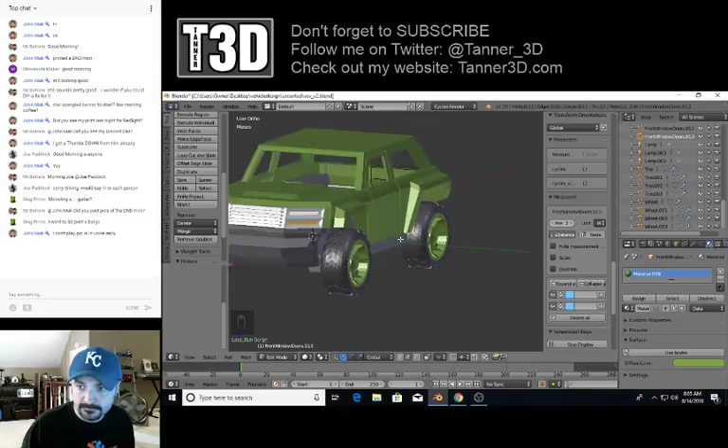Get this positioned. We'll go to the screen share. All right. This has been the latest thing I've been working on. And it's got a... hide that one. Nope. Is that what I wanted to do? Oh, it's because I was in edit mode. Hide that one, and hide that one. And hide that one. There we go.

So there's also a roll bar version of the new Jeep I'm working on. I've taken some of the things that I've learned in the process of modeling and building this stuff and decided to just start over on my Jeep. And so that's where I'm at right now, redoing it from scratch. It'll be fewer pieces, easier to print, easier to assemble.

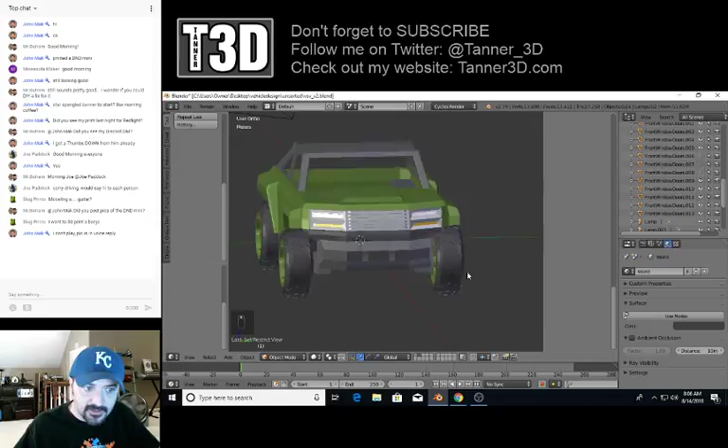So yeah, you see down here now, you can see it highlights, like right now I'm clicking down the middle mouse button, you can see it lit up. So we're screencasting the stuff that we're doing now, so that when I hit H to hide that, you'll see that I hit H, and H hides.

So you'll be able to follow along a little easier now with the stuff that I do, because any keys that I press or mouse clicks that I make will be highlighted in the lower left hand side of the Blender screen. Hopefully that'll make things easier for people that are following along and trying to learn how to do this stuff. Because that is the goal.

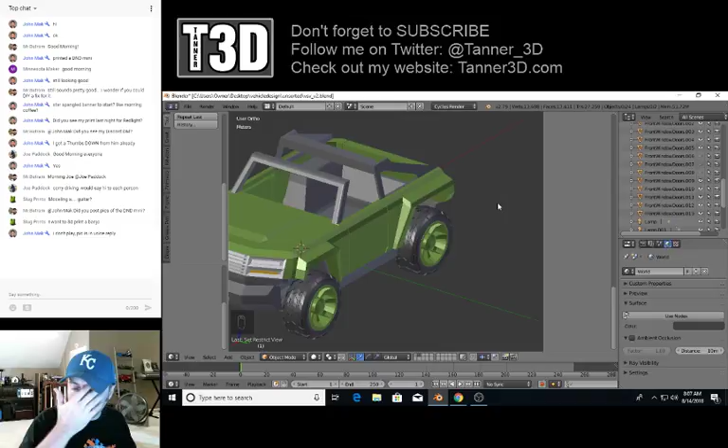And so I had seen some other people's videos that did it, and I'm like, well, how did they do that? Well, it turns out that the Screencast Keys function used to be built into Blender, but apparently it had an issue, so they removed it from being a default part of Blender, and now you have to install it manually. And so we might encounter that error, and if we do, I don't know what that error is. We'll find out together.

Using my Chris's basement coaster this morning on my desk. I love it. It's an awesome coaster.

All right, so what do you guys want to do this morning? You want to... yeah, Mellow Yellow, Breakfast of Champions, right? I didn't feel like making a cup of coffee, and I don't have one of those cups to keep it hot, so I got to drink coffee pretty quickly while it's hot, and so I didn't feel like messing with making it, and then I didn't think y'all want to sit here and watch me drink a cup of coffee quickly so it didn't go cold. If my soda goes room temp, that's okay. I'll still drink it.

So I didn't plan this show out this morning. I got up this morning, and while I was thinking of show prep, the only thing that got on my mind was the Screencast thing, and it took me longer than I anticipated to get that going because I had to manually install the script and run it, and so I didn't do much show prep for today, but it is what it is.

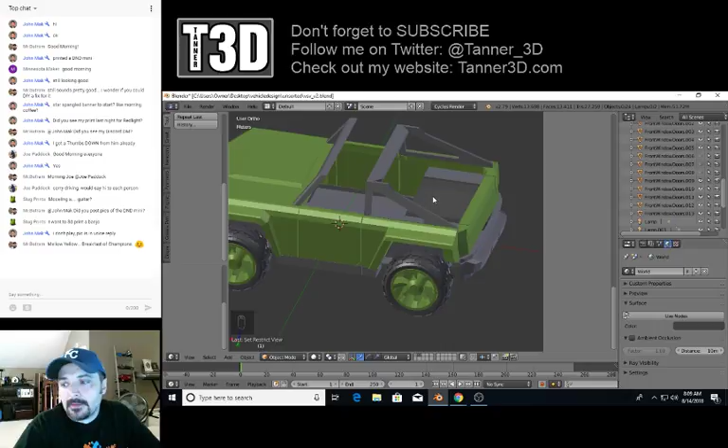So yeah, I still got to hinge the doors. I got to hinge the tailgate. I got to build an interior, so dash, steering wheel, seats. But I left these nice little holes in the bumpers so that I can build modular add-ons to click into the bumpers. So like grill guards and winches and trailer hitches and that kind of stuff, so they can be just snapped into place, and it'll give me more modular options when designing it.

The hurdle I'm facing right now with the doors and hinging them is, Roy Holly's been printing some of my designs and stuff, and he expressed the desire to have doors be removable. So I'm trying to figure out how to hinge them, make them removable, and make them, when they're removed, not have any piece of the hinge still sticking out and detracting from the appearance. And I like the idea, I just got to figure out exactly how I'm going to do it. I like the idea because, again, it adds to the modular nature of the design.

Oh, there you go, Joe. That's a good idea. All right. So, did I put that on this over here? Okay, hold on, because it was on my other computer.

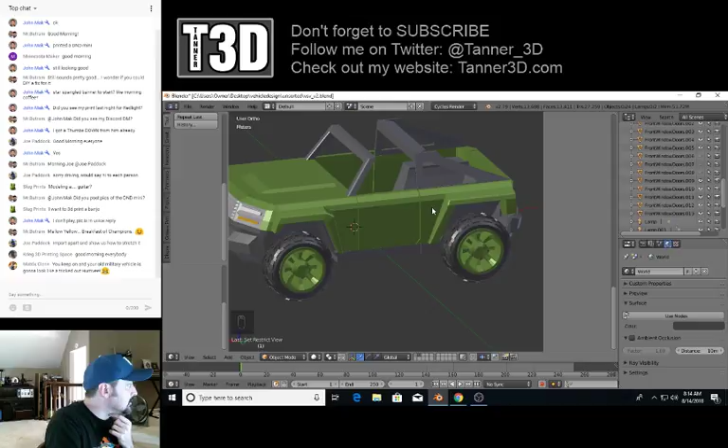There it is. Okay. So let me save as, and let's put it on the USB drive. Okay. And then let's go back to the USB drive. Make sure it's there. It is. Where's it at? Oh, right click there. Come on. And eject. There it goes. Ejected. Now I'm going to move my guitar because I set it right in front of the computer.

Plug it in here. All right, so Joe Paddock sent this to me clear back on the 30th and asked me how he could modify it. And so I told him I could show him how to do that. So that's what we're going to do real quick, we're going to show Joe how he can modify this, because he said he wanted to make it deeper, but he didn't tell me how much deeper or any of that.

So let's save this and go to a new file, delete the cube in the file, go to import, import an STL, and we'll go to the E drive. All right, so here's the item that Joe wants.

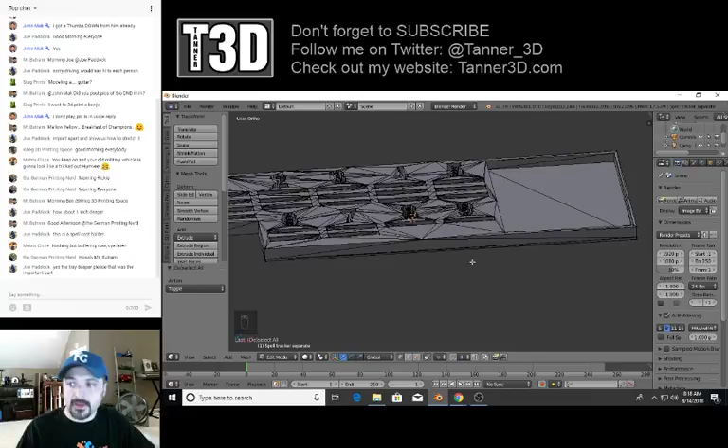I know the little coin slots, you want them to stay that depth. I didn't ask you if you wanted this to stay as shallow as it was, or if you wanted this to be made deeper just like the rest of it. Okay, so go here. I'll show you how to do this, Joe. B for your box select tool. Select the vertices there. B for box select.

Select all the bottom vertices. So now we've got the bottom of the object, and we've got the bottom of the tray, and now it's simply a matter of dragging them down the desired depth. That's it. That's all there is to it, man.

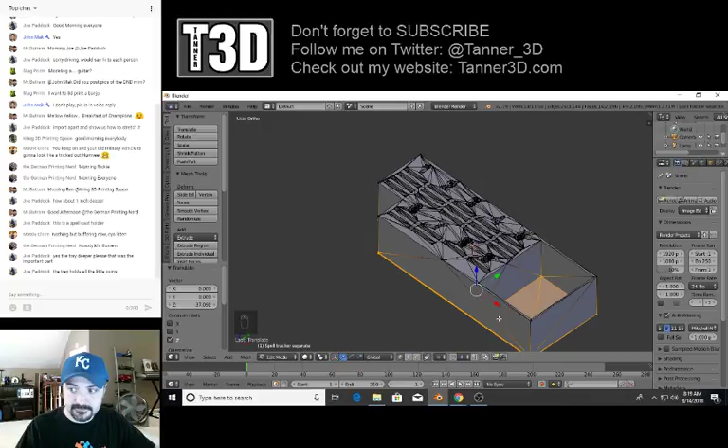By that same token, from the top view, say you decided you wanted to make the tray longer, we go into Z for wireframe view again. Say you wanted to make the tray longer, you could just grab those vertices and slide it out. So you can make it deeper, you can make it longer. It's just a matter of manipulating the vertices.

It is easy, man. It is. It's just a matter of knowing what to grab.

So yeah, when you're looking at it, let's go back to its original form. Deselect everything. Go back into the side view. Number pad 1 gave me the side view so that I could see. And when I hit Z, I go to wireframe view, and you can see by looking at the little dots. The little dots are your vertices. See these here; those are the bottom vertices.

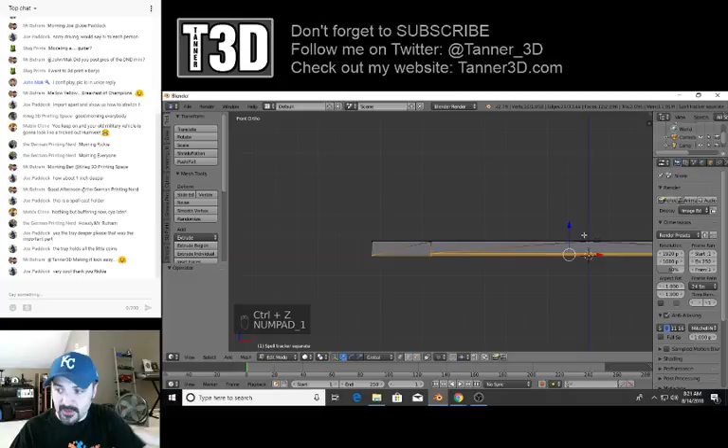So if, say, I selected the bottom vertices without selecting the bottom of the tray, then when I moved it down, it wouldn't move the bottom of the tray. But you said you wanted the bottom of the tray too, so then you just go back into wireframe view.

You can see that these vertices here are the bottom of the tray. This one and this one. And why we go into wireframe view and into the side view like this is so that we made sure we only grabbed the vertices we wanted, but we went into wireframe so that when we did the box select, it selected the vertices at that spot all the way through the model, because otherwise you wouldn't have been able to select those inner vertices as easily.

And so now that we had those all grabbed, when you move it down, you can make it deep enough to make it a drink holder. So it's a piece of cake, Joe. Really, just follow that, and you'll be doing it yourself.

Now, if you had a specific depth you wanted to make it, I'll show you how to do that too. Now, remember we installed the Measure It tool back on the Blender Basics video.

You would select 2 vertices that you wanted to measure the length of. See? Selected those 2. Click Segment. Click Show.

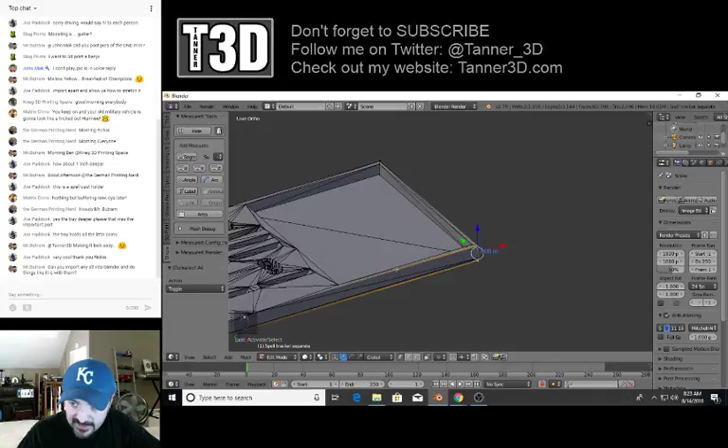Yes, you can take any STL, bring it in, and modify it. The only thing is, once a file's been saved as an STL, you'll notice it makes everything into triangles. So you get a lot of points, and sometimes it makes models that were already, like if the mesh was a fairly complex mesh, you'll end up with lots and lots of little triangles and lots and lots of vertices to try to manipulate. But you can absolutely import and modify anything.

Okay, so say we did the Measure It tool right here. Let's measure the length as well. We'll select that vertice. Oh wait, let's do this from the other side because the full length is easier to do that way. We'll select that vertice, holding down Shift, we'll click that vertice. We'll click Segment, and it says it's 208 meters long.

Select those and we'll segment those as well. And it says that's 77 meters long.

Yeah, I'm guessing he designed it. Well, what could be is he designed it in meters so that he didn't have to use the scale function when exporting the STL. Because for some reason, Blender, when you export an STL, it'll make it 1,000th the size that it used to be. So I'm imagining he just designed everything at that 1,000 scale so that he could export at 1-to-1 scale.

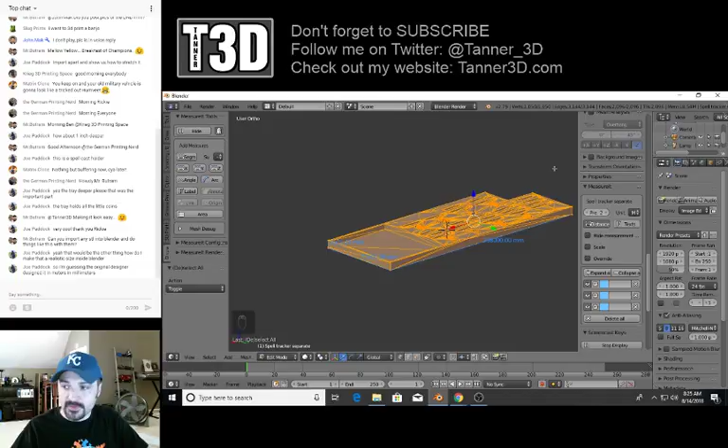And let's go in here and let's change our unit of measure to millimeters. All right, so we selected the whole thing, and you just hit S to scale, and you scale it down.

Which it's way off center now, kind of floating up in the air too. It was supposed to have been, what was it, 200 and something millimeters. So if we were to scale it down.

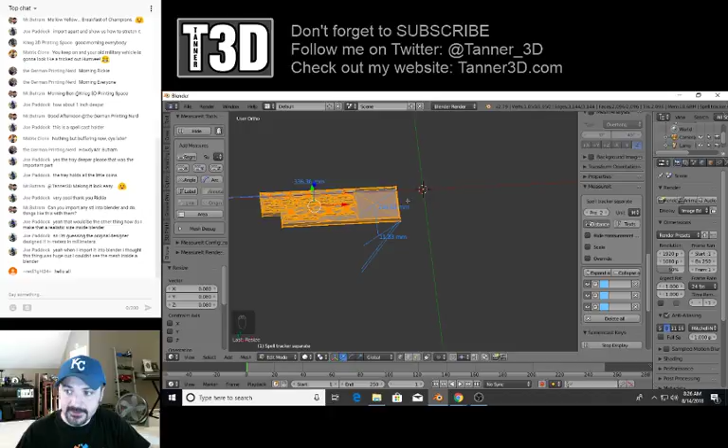When you first bring it in, it's because he designed it so large. Your default camera positioning and all that is going to have you inside the model and everything else. That's why I prefer to model in scale.

But yeah, you can play around with the dimensions and scale things wherever you want them. Right now I probably underscaled it, so I forget what our exact measurements were, but that's how you scale it. You just select it and hit S, scale it up or down. When you get it the exact size you want, stop and save it.

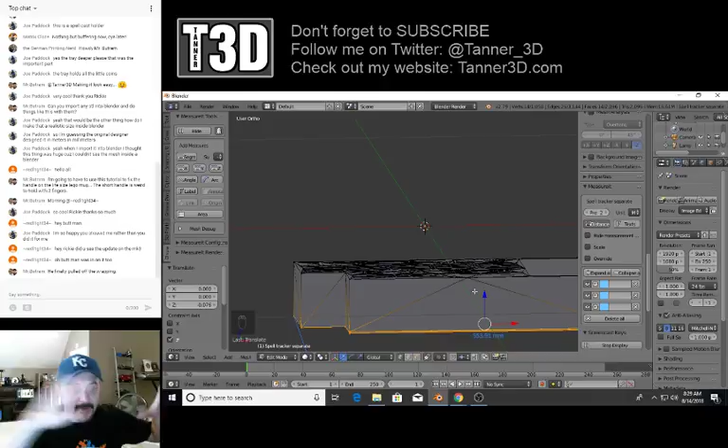I haven't been keeping up on all the stuff on Discord. I just get on there and get in the voice chat most of the time and forget to look at the other channels.

John Mak printed it out.

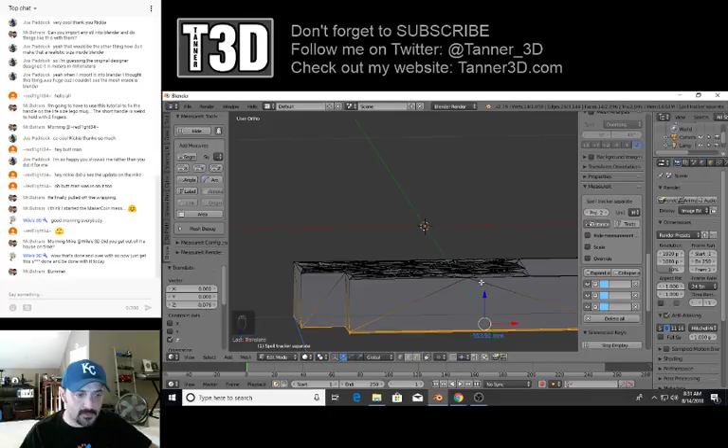So, Joe, I hope that answers all of your questions in regards to modifying this STL to suit your needs, and easily be able to make those modifications.

Good, man. I was afraid when you sent it to me, before I opened it up, I was like, oh, this is probably going to be something really complicated, like that tore up toolbox thing that Ben Craig sent me and wanted me to fix. I opened it up in Blender and it was a nightmare. It had intersecting faces all over it, duplicated layers, and all sorts of weird stuff. Blender's make manifold command couldn't handle it, so it was going to be one of those where you had to go in and manually do it, and that was going to take longer than building the box from scratch would have.

Just now downloading Blender, huh, Ryan? It's worth it, man. It's a very, very powerful program.

Let's see, let's go to File, New. Let's delete that.

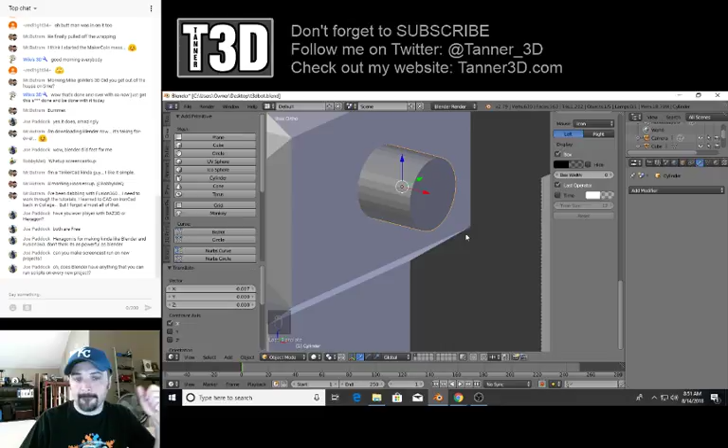So this will give him the ability to raise and lower his arms like that. I'm going to edit this, flare it out that much, just flare it out a little bit.

All right, so we gave it a point of articulation. Now we haven't combined it to the model yet because there's a couple other things we're going to do. We've got this piece. Now anything we're going to make as a positive here, we've got to have a negative with some tolerances over here.

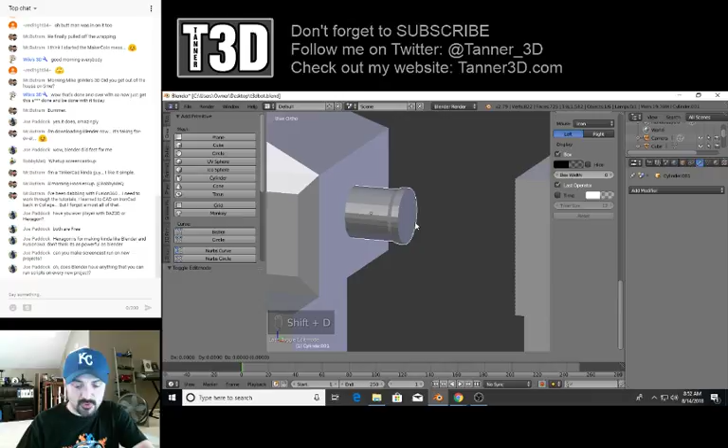So I'm going to hit Shift D to duplicate it, just hit Enter so it stays in place, hit S to scale it up just a hair. And that looks like maybe might be enough, let's see.

I'll zoom in closer here. Okay, we'll go with that. Alright, so now we're going to take this one. Oh wait, I want to make them the same length, with a little bit of tolerance.

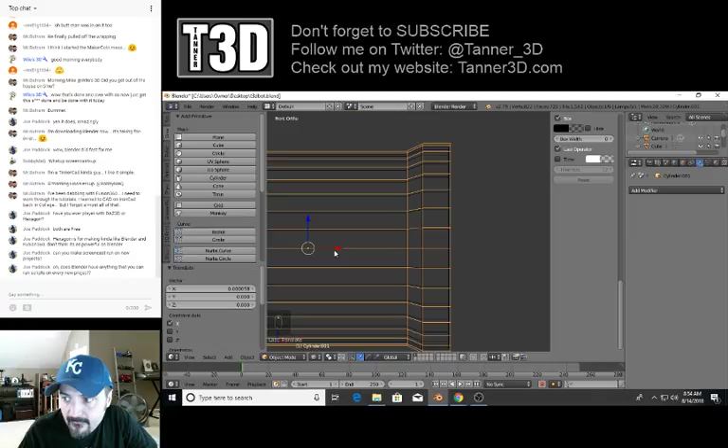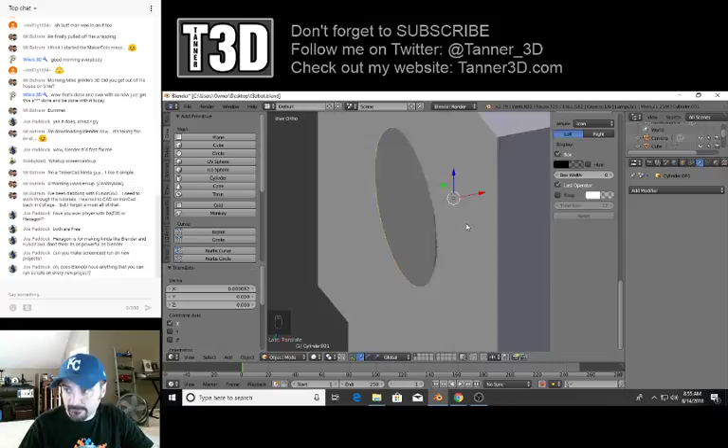Okay, so back to that view. We want to sink it in as far as we can without sinking it all the way inside.

Okay, so now we're going to do some Boolean operators. We're going to select the peg coming off of the shoulder and the body of the robot. Go to Tools, scroll down to Bool Tools, remember we installed that, that's another add-on we installed. And we are going to do a union between those two parts. Now they're one piece.

And then we're going to select that and that. Whoops, I was hitting the caps lock key instead of Shift. Okay, Shift, that is our second part. So now we selected that first and the arm second. So now when we go to difference, it should carve that out of the arm, just like that.

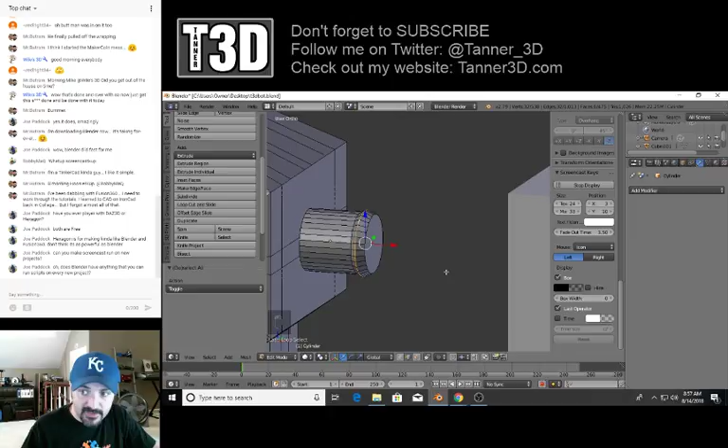But you know, where we're at, I would give that a try first and see if you could press fit them together. Then you press fit them together and you should have a robot now that his arm goes up and down.

But we still need to create the other half again, so we'll come back out here. We're going to go to modifier, mirror. We don't want to mirror it along the X because that.

Okay. Well, see, this is why we do this stuff together.

All right. You'll notice whenever I made that Boolean operator and merged these two objects together, it made the new center point of the object here. We don't want the center point of the object here. We want it back on the 3D cursor. So it's Control, Shift, Alt, C. Origin to 3D cursor.

Now mirror along the Y. Nope. Z. Yeah. Okay. That doesn't seem like it should be mirrored along the Z, but we're going to go with that because that worked. And we want clipping enabled because we wanted to make one solid piece. And we're going to apply. And then same thing here, we're going to Control Alt Shift C. Move the origin to the 3D cursor.

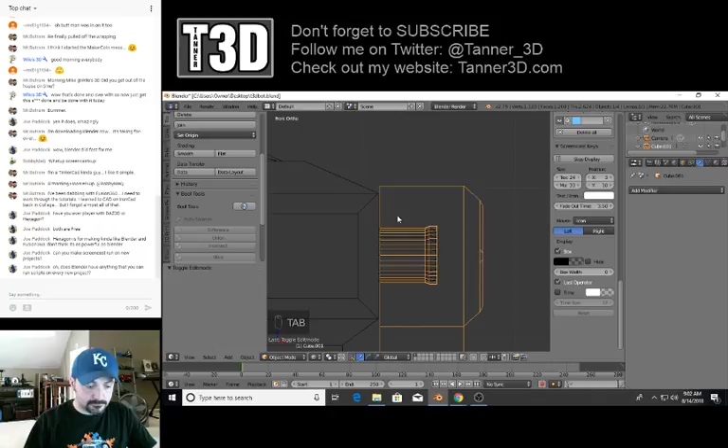We're going to add a mirror modifier to the arm. There we go. We don't want to merge. Go ahead and apply that. So now we've created an articulation point. Our robot should be able to move his arms up and down.

I think when you print him, you could get away with printing him with print in place hinges, and it may not even have to do any assembly, if you do supports where touching the build plate. Otherwise, we would export each arm individually, and we would export the body individually. But I'd like to print this and test it as one piece.

But before we go any farther, 3D printing toolbox, because we may have some issues with some of the stuff we did because we did a Boolean operator. We have some non-manifold edges to contend with. So, okay. It doesn't seem like anything major. We'll see if Blender can clean it up on its own. We'll click Make Manifold. Looks like Blender cleaned it up okay on its own.

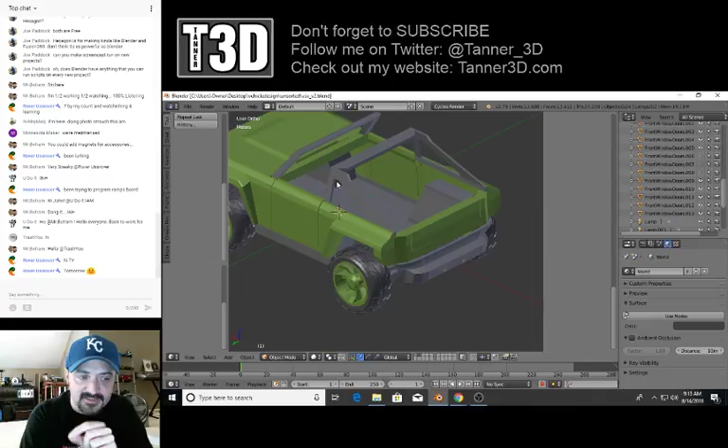So the engineering issue I'm trying to figure out with this is a hinge that is both functional, removable to remove the door, and looks clean once removed, as clean as it does when it's assembled. So that's the thing that I've been racking my brain trying to figure out right now, because I need to hinge this door in a way that the hinge can be pulled out and removed, and that this stays looking clean.

I'm not sure how to properly do the geometry on a door hinge like this one. I don't know if you can see that, the little arm located in there. Because if I could properly figure out the geometry of that so that I could hinge the door that way, then I could design it so that it slots out like this door does. So I may need to reverse engineer this a little bit, because then you could slot that out and then slide that back in, and it would still look clean-ish.

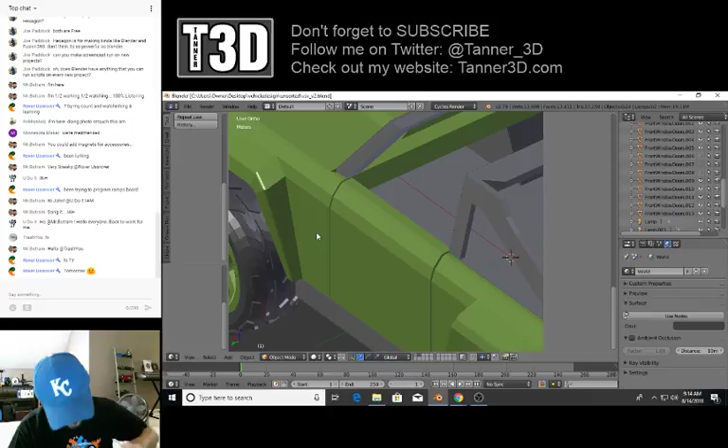And we would have removable doors on the Jeep. If I can just put this one back together. All right.

Hasbro's engineers make a whole lot more money than I do, and have many, many more years of doing this and schooling that goes along with it, while I'm not an engineer. Not by the slightest. More just an artistic guy that likes to tinker with stuff.

So yeah, if I could work that geometry out and figure out how to fit it in this space here, and then I could slot the door just like they have their door slotted, and then when you slot the door off of the hinge, you just slide the hinge back in, and it'll be tucked up out of the way and still have a nice clean appearance to the exterior of the vehicle when it's doorless.

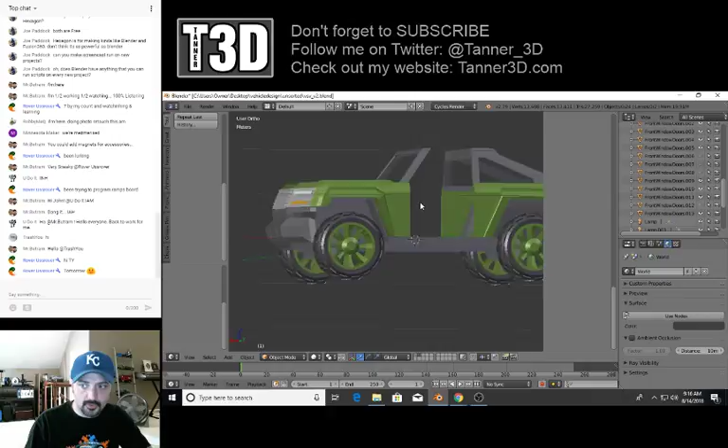Because Roy Holly, who's been printing a lot of my designs, expressed a desire to be able to print the doors as a separate piece, and to remove them if you wanted to have that open look and feel, like taking a door off of a Jeep Wrangler.

I've been trying to... it's the wrong doors. I haven't labeled this stuff yet. I need to go back and do all that. But I've been trying to make the connection points as I go on this. So the bumper slots onto the body there. The axles slot onto the body there.

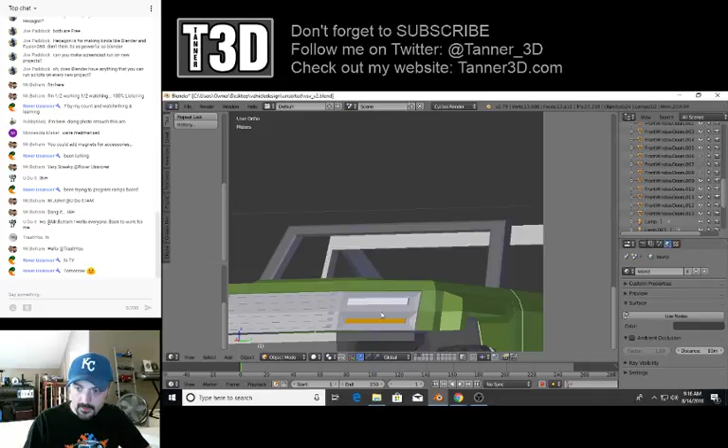I need to make a connection point between the bumper and the grill. I've already made a connection point where the grill kind of slots into the sides of the front clip there. And then I need to hinge the tailgate, build a steering wheel, dashboard, seats. And then I can start building accessories.

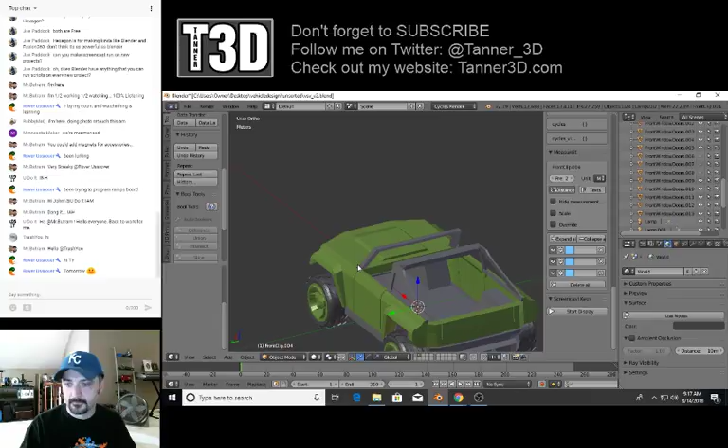Like I want to build little lights that clip onto this bar here. And then there's spots for accessories to clip in on the front and rear bumpers. So I can build a bunch of different accessories for that. Maybe build a gun that slots in there on the middle, and that way you'd have somebody, like a figure standing up in the bed and working the gun.

And then seats that are removable so that we can keep everything modular. I mean, that's the whole point of my designs, is I want them to be modular. It's kind of like a model kit that you can choose what parts you want. You know, like back in the day when you used to go and buy a model car, and the model car could be built 2 or 3 different ways right out of the box.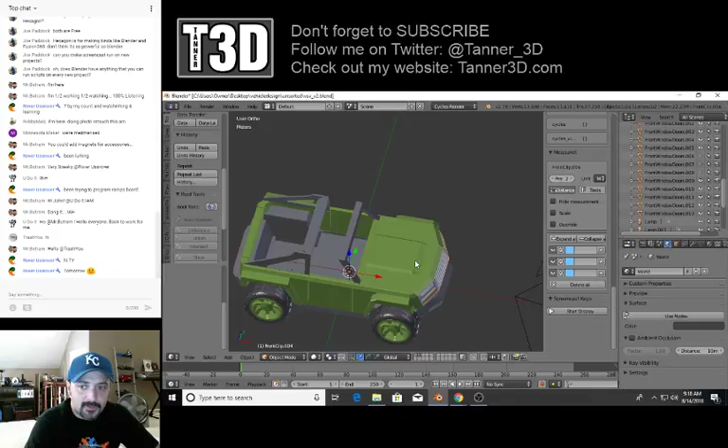This would be you sit down and you just cherry pick the parts that you want, whether you want to print the roll bar version or you want to print the hardtop version, say. And then you would add whatever accessories you wanted to the front and back. And if we have the removable doors and all that, then I can design different things that go on the doors, like those cool open gate looking doors that they have on some of the Jeep trail rigs and stuff like that.

And yeah, just keep everything modular. You choose the wheels and tires you want, and they'll all use the same axles. I've already started on the 4-door stretch for it too. So you choose whether you want the 2-door, the 4-door, the roll bar, the hard top. You'd just be able to go down the list, and you can have different grills for some totally different looks.

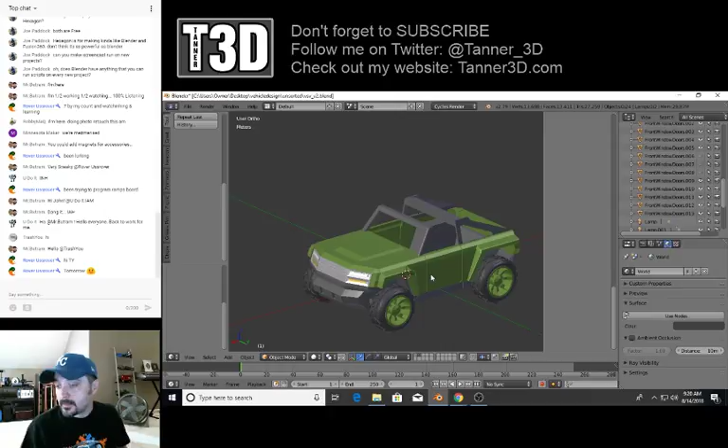Select that one. Just hide that. And I think the first one I want to print when I get ready to print it is this version. So still got to figure out the hinge thing, but let's go ahead and start building a seat.

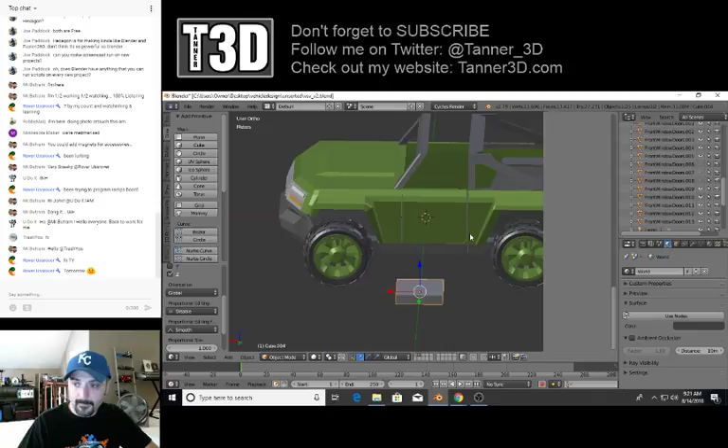I'm going to go up here to create. I'm going to bring in a cube. Because we're working in this scale, it's coming in really huge. I'm going to scale down the cube, slide it out to the side to make it easier to see everything. We're just going to rough out the seat shape, and we will tweak the vertices on it to get the scale afterwards, and then slide it into place and then figure out how to attach it.

So we're going to go into edit mode. Control R for a ring cut. Scroll the mouse wheel up once. S to scale before we lock it in, and we'll scale it along the Y. We'll do another ring cut, slightly up from the center. Excuse me. So let's see. Let's go into Edge Select.

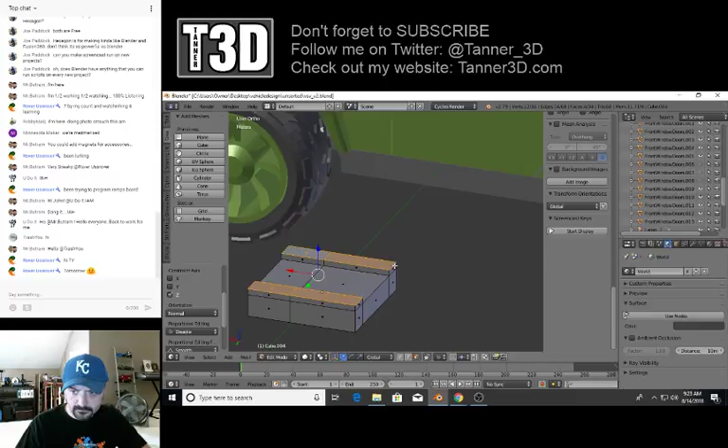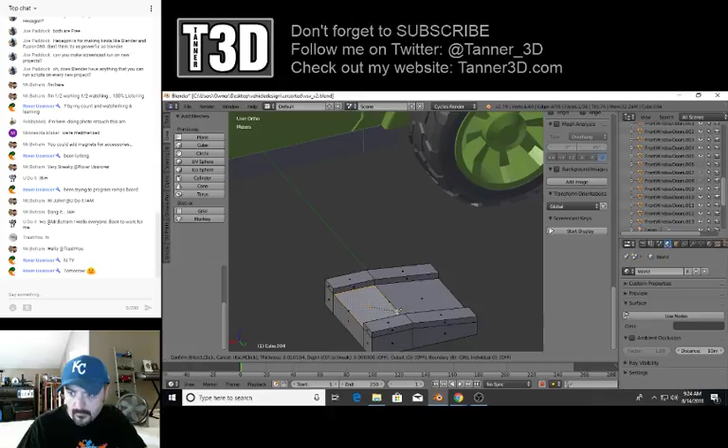Let's not do that. Let's do it this way. I'm going to face select. E to extrude. We'll extrude them up a little bit. Scale that down, bring it up.

Back into edge select. Select that edge and that edge. Slide those back. Select that edge, that edge. I'm going to scale those along the Y in a little bit. Scale those along the Y out a little bit.

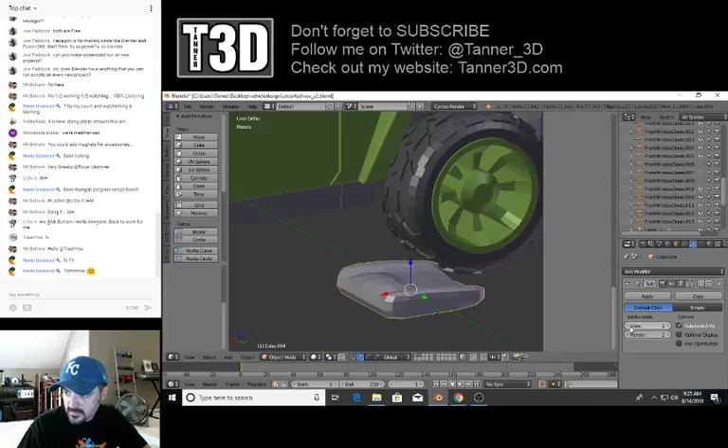Now I want to take a look at something here. Go to the wrench, add modifier, and let's do a subdivision surface. Okay, no. So subdivision surface was making some of the things soft that I don't want soft. So what you do when you have that in Blender is you create a crease. So I'm going to select all the edges that I want to kind of maintain their shape.

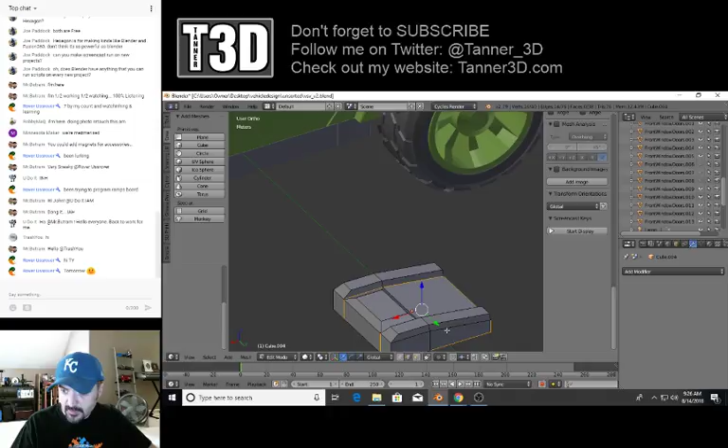Maybe not that one. Kind of want those to maintain their shape. Maybe that one. I'm going to try it. Shift E and drag your mouse out. It's going to create a crease along those spots. So now when we go to add a subdivision surface modifier, you'll see it doesn't affect the creases the same.

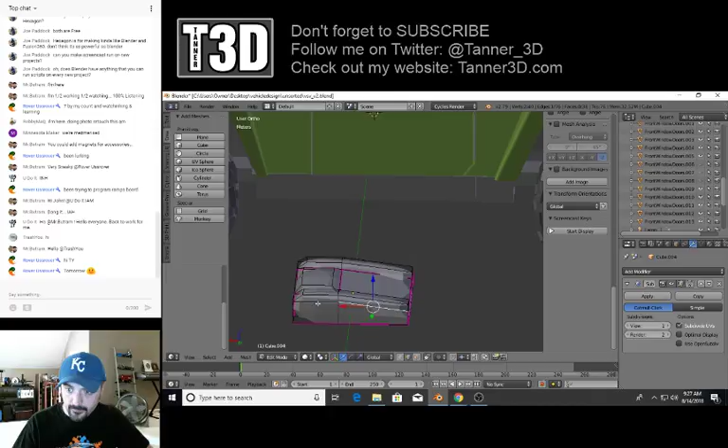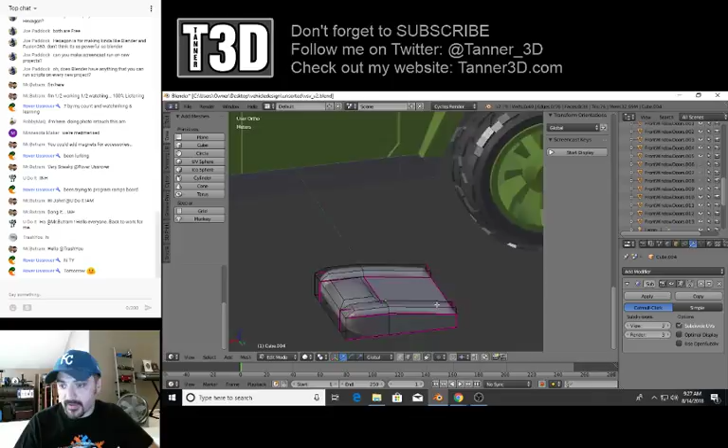So now if I wanted to go ahead and crease that. I wonder what happened if we went ahead and added those edges. Crease them out. There we go. So there. Okay. That's kind of giving us the basic seat bottom shape.

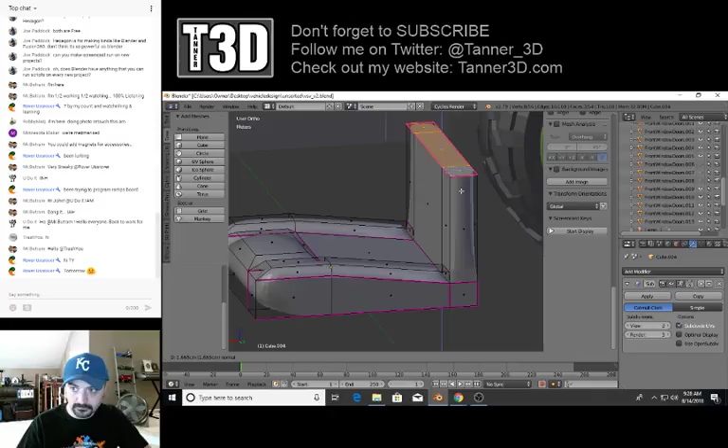And we're not going to apply the subdivision surface modifier yet because we want to continue working with the model. So we're going to face select those, to extrude them out. And I want to crease those. Wait, let's undo that because we want to slide this whole thing back a little bit, give some angle back on the seat.

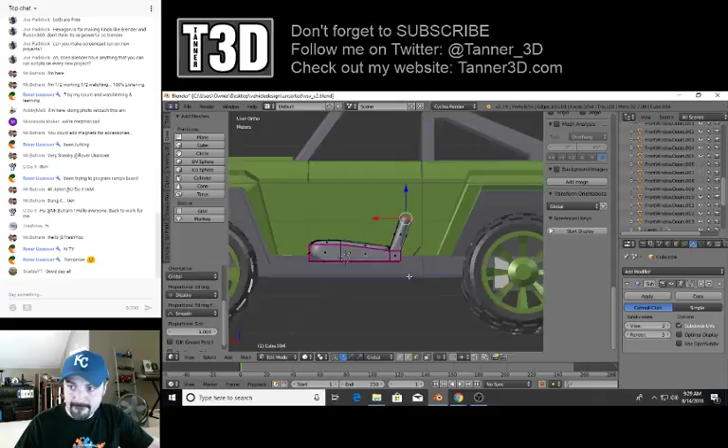Not the X. Y? Yeah, there we go. Extrude. Rotate all the way.

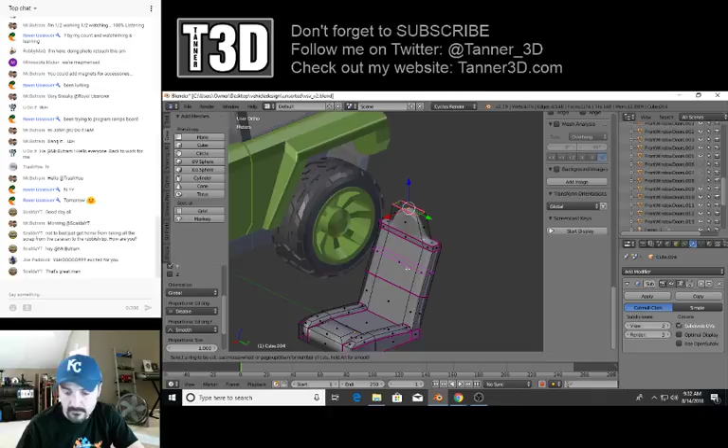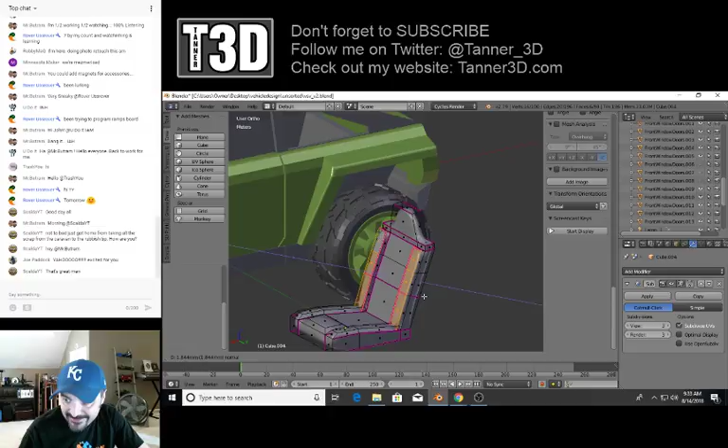Crease those. Whoop. Dang it. Extrude. I don't want that one. I'm having a hard time grabbing the edge I want, because it keeps grabbing this edge, and I don't want to grab that edge. I want to grab that edge right there. Got it. And I want to grab on the other side that edge. I'm going to slide those up so that they no longer intersect.

And then I want to remove the crease. And see, this was something I had to look up the other day, was how to remove a crease.

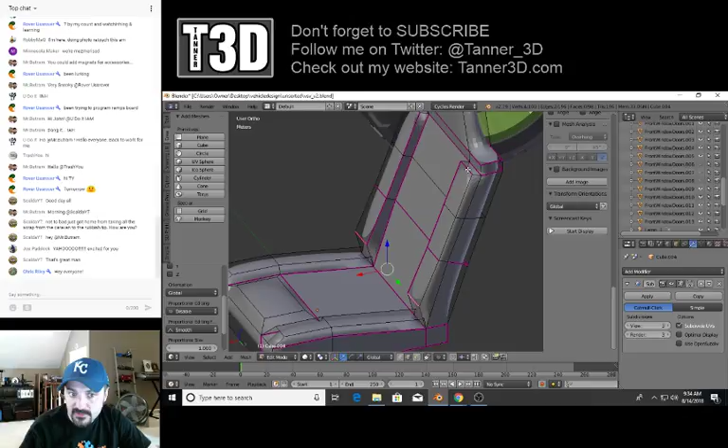So I want to remove the crease from these edges. And so I had to look up how to do that. There it is. So in the N toolbar, when you hit N, this toolbar comes out. You're looking for edge data. If you added a crease and you want to remove it, select the edges that you have the crease on that you want to remove, and go down here to mean crease and put that to 0, and that'll remove the crease.

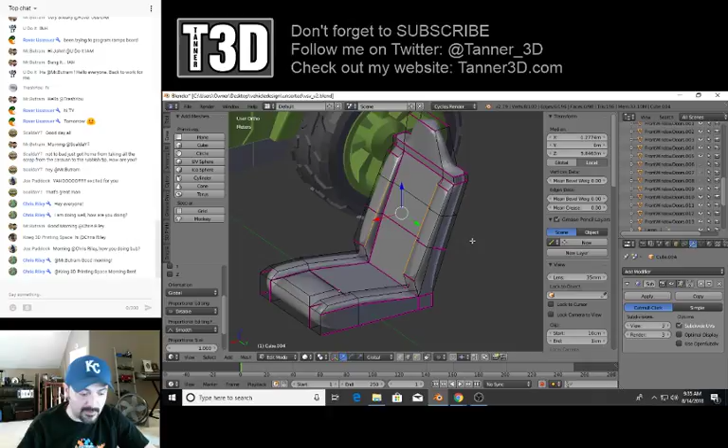Which looks like I need to do the same thing. There, there, there, and there. The mean crease, 0, removes the crease. It's starting to look more like a chair.

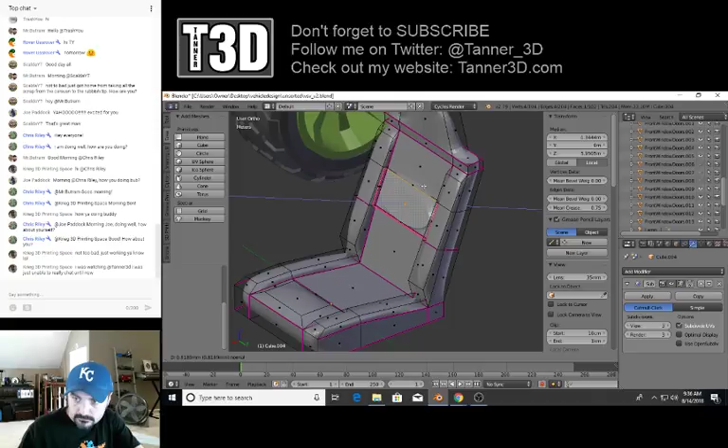And now I'm working on my new Jeep design, and we're building a seat for it right now. What would it look like if I added a crease to that one? Shift E to add a crease. Yeah, I like that better. Okay. No, I don't like that at all.

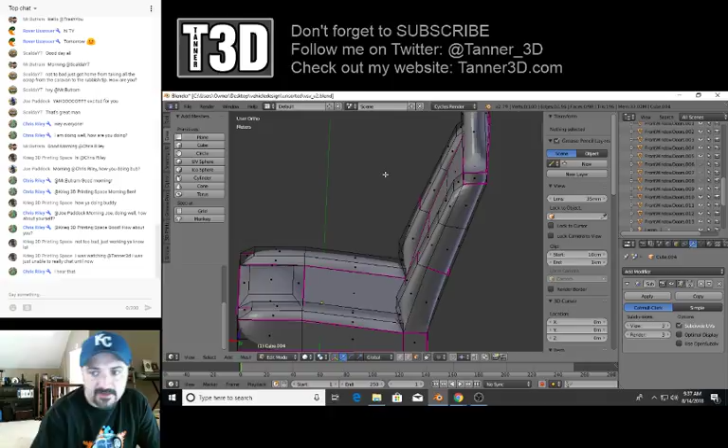So yeah, today we've been playing around with this seat. We're playing around with the subdivision surface modifier and showing how adding creases to an object can affect the look and shape. Because I want the seat to look soft, you know, in appearance, and so in the process, I'm trying to add and remove creases here, which I can see that one's going to be a problem, that crease right there.

Don't want the face. I want just the crease. And I want that one on that side too. Slide those forward. And then remove the crease. So go over here and mean crease to 0. There we go. That smoothed that out a little bit.

And then we're going to go here and here. And we're going to remove that crease as well. And then we're going to scale those in, hit S to scale along the Y. Round that out a little bit more.

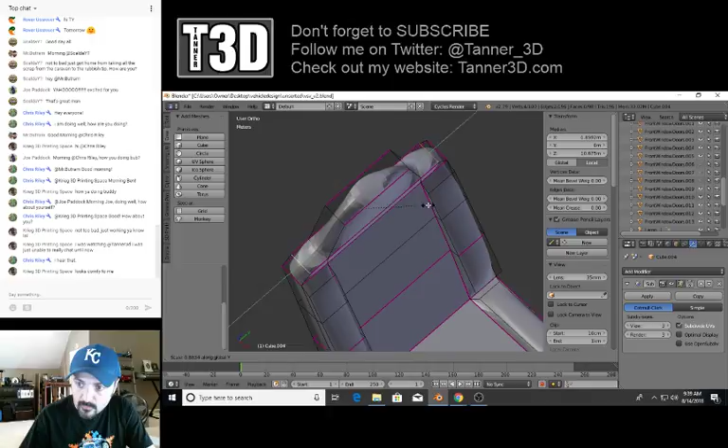So yeah, I was able to add the Screencast keys to Blender, so I can now share what I'm doing as I do it a little easier. That way, if I forget to tell you, which I forgot to add it back in. My gosh. You guys got to tell me this stuff. It'll affect your learning more than mine.

Save that. And so yeah, again, I've got to add that again. Text editor. Run script. Back down here to 3D view. Start display. There we go. Now we got the screen cap. Down here, you can see the mouse buttons, like I'm clicking the middle mouse button right now, and it highlights that. And scrolling highlights. So then when I do something like, I'll select that, left mouse, Shift E.

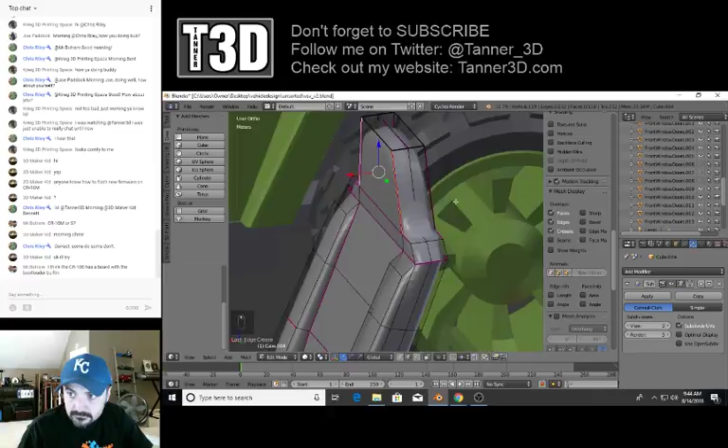Need to decrease the strength of the crease there. I don't want to remove it. I just want to decrease the strength. Smooth that out a little bit. Is that looking like a seat for a G.I. Joe Jeep yet?

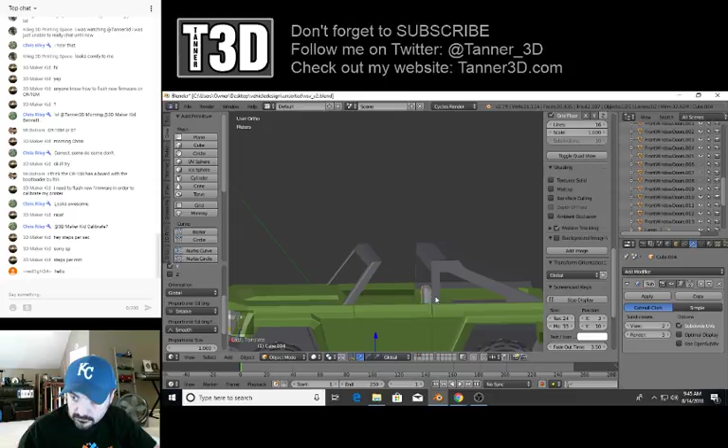Alright, so we're going to tab out of that. There, you can get a better view of it. And we're going to slide it over. Whoops, I messed up something. I want to slide just over there. And I'll have to take some measurements and stuff to position it properly and resize it if needed. Right now I'm just going to roughly get it into rough position, and then I'll modify it as needed later.

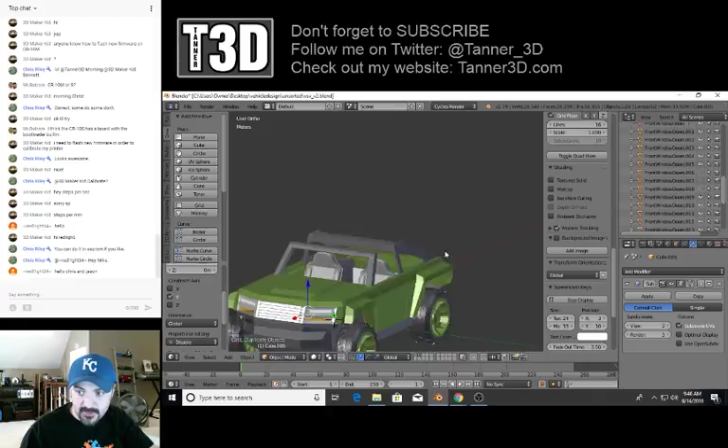There we go. And just like that, the Jeep has seats. Like I said, they're not in their final position yet, or even their final scaling yet. I'll have to sit down with a ruler and G.I. Joe and make some measurements. And then I'll have to fab up the way I'm going to connect them to the floorboard.

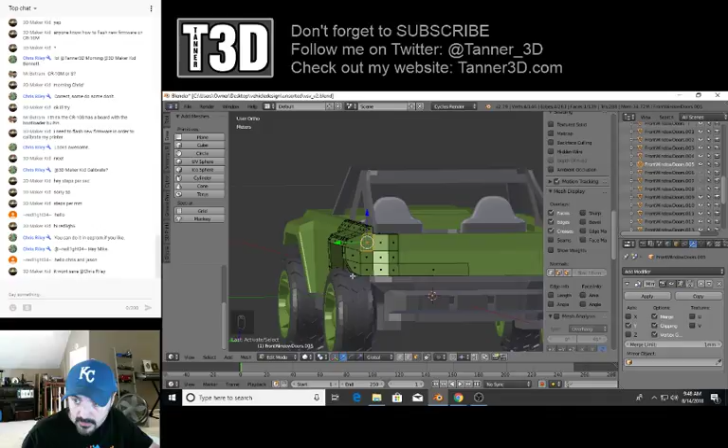This is where the problem of me not planning stuff out comes in, because I'm trying to figure out exactly how I want to do the taillights. Just inset the face like that. Extrude them out a little ways. That's too far.

Do that, and then I could go over here and do a new material, color, red, darken it up a little bit. We will assign that to right there. Viewport colors need to be more red. Okay.

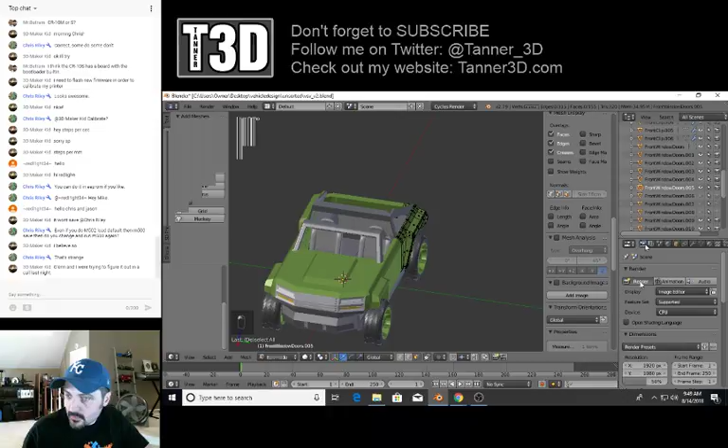That way, anyway, when I go up here, wait, where's that at? I don't want to render any of the stuff I have hidden right now. So then, when I go here, render. Oh, that was a mistake, because it's probably going to bog down my system. So if the video starts getting choppy for a minute, it's because I'm rendering in Blender. I need a more powerful machine to stream and render at the same time, I guess.

Alright, so there's the render of the Jeep with the seats added.

Another thing you can do in Blender is see what the render view is going to look like in a live viewport. I caution everybody that this may really affect the stream. If you hit Shift Z, it will try to live render, so I may be turning into a stop motion animation right now because it's really, really processor intensive.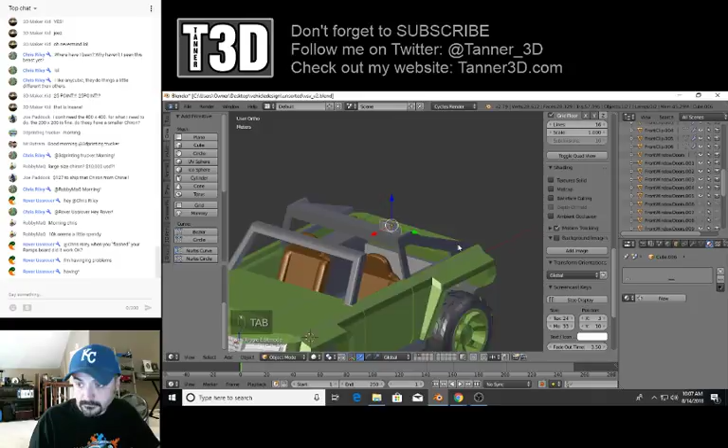But no, the Anycubic Chiron, it's $540 for the printer. But I'm sure somebody out there's got free shipping on it. Whatever site you were on, Joe. And if they don't yet, whenever GearBest gets a hold of it.

Morning, Jesse Foreman. Thank you, sir.

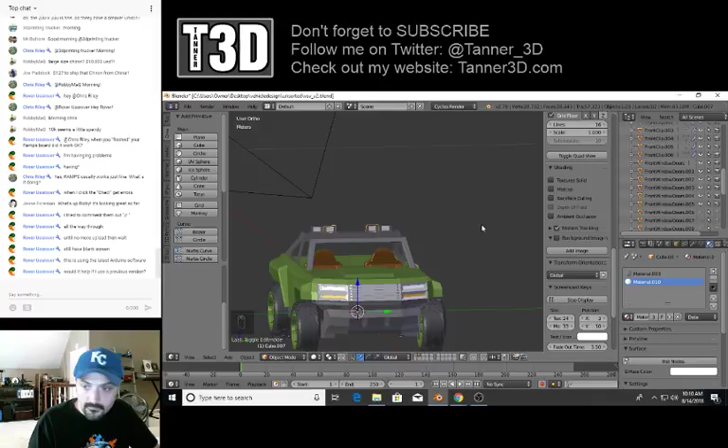I'm glad Chris can be here for you, Rover, because I have no idea how to help you in any of that stuff. I, knock on wood, haven't had to do any firmware stuff yet. I'm sure I will. I'm sure I should. I should probably be looking to update the firmware on both of my machines. I have not done so.

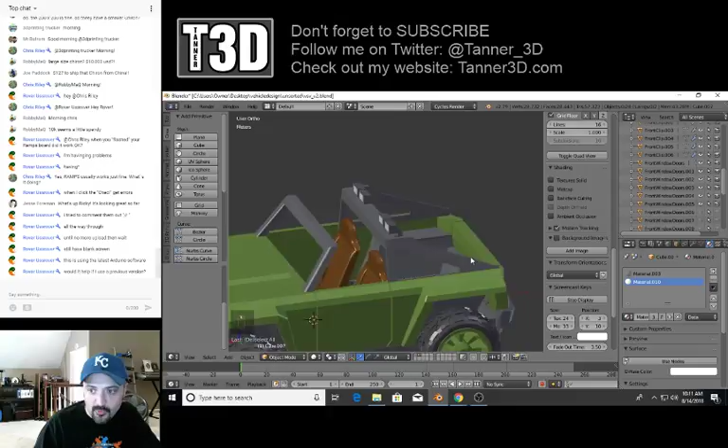All right, so Jeep is coming together. And again, try and keep everything in a modular nature. If you don't want the lights on the roll bar, then you don't have to have the lights on the roll bar, because they're just little clip-on deals that clip on the roll bar.

Now, one thing that I'm absolutely atrocious at designing is weapons. I don't know why I can't design weapons to save my life, maybe it's because I've never been a guy that's been into guns. But I can't design reasonable looking weapons at all. So I need to sit down and study some pictures of stuff and try to emulate some of the things that I find that I like, because I want to put a little clip on it where it would clip on just like these lights do in the center of the roll bar.

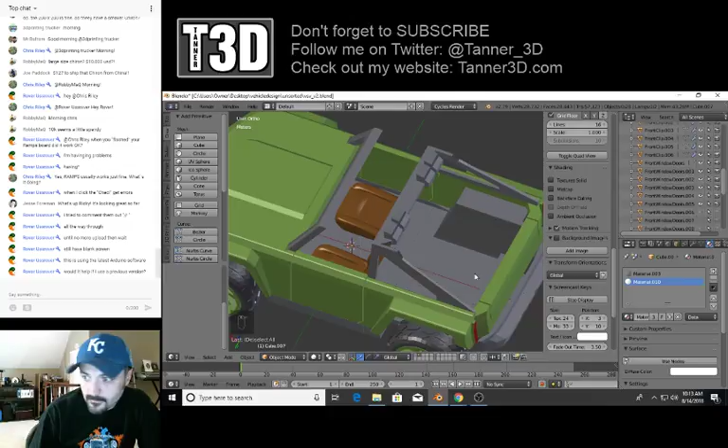I just killed my dumpster. It's okay, I need to print another one anyway. I'm thinking of a little turret gun like this. I don't know, I may even sit down and try to copy some of the stuff this has going on, maybe not exact but some of the same concept, and have it clip on and mount right there. Then a figure standing in the bed in the back could be operating the gun, just like in this.

For scale, I've been using this to measure off of. I guess they're kind of similar. It's got a cannon that pops up on it, but not a place for someone to stand, it just pops up.

This is more complicated than anything I want to get into. It has all sorts of springs and latches and stuff that hide it, and when you slide it forward, it pops it up. But I do like the deployable windshield armor, I do like that about this.

So anyhow, I've been using this for scale for my Jeep because I like the scale of this. It's nice and wide and kind of blocky, but it's got some heft to it, so I've been using it to kind of... I want my Jeep to be in line scale-wise with this. This is the Steel Crusher, is what this is called.

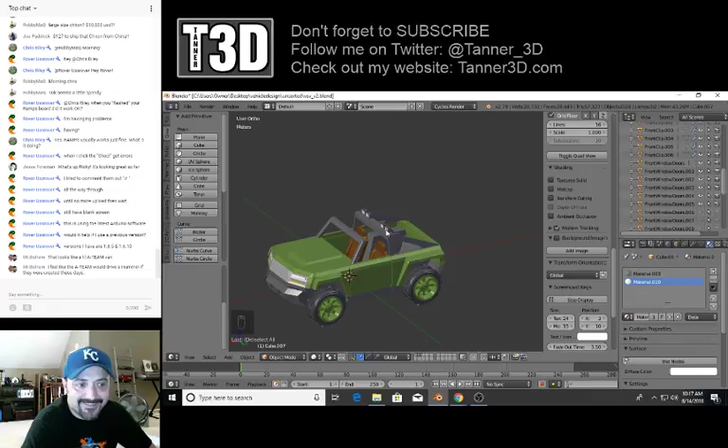So yeah, today we built seats, we built lights for the roll bar. Now, one thing I noticed, we added taillights. One thing I noticed is that building a steering wheel at this scale and then successfully 3D printing it is really tough.

So let's save this. Open. Did I save steering wheel in the components? I did, I did. Now I need to beef the steering wheel up a little bit, because this is a steering wheel I used for the truck, which mine is now the crushed truck, because my grandson is a little hard on stuff. So I need to beef it up in some areas, and then we'll use it on the Jeep as well.

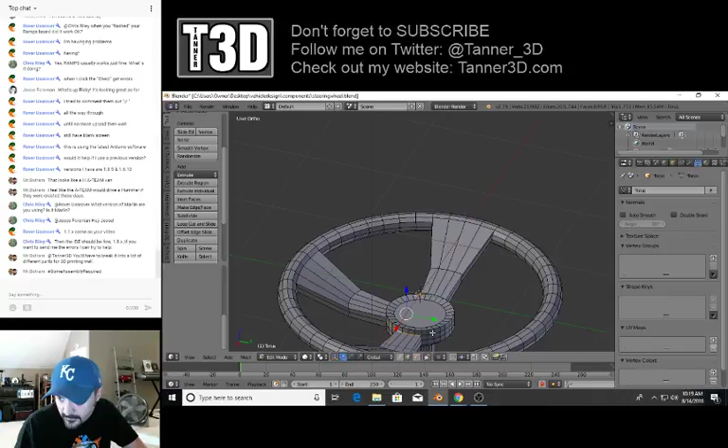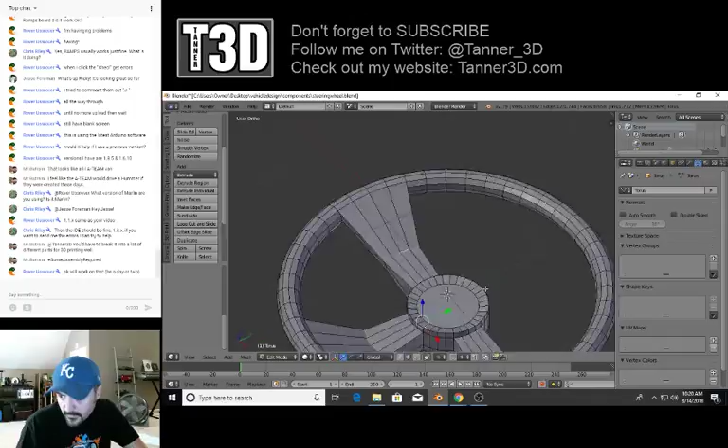So we'll thicken that up. It'll make it a lot easier when I get that out of the way. Alright, beef that up. Yeah, a lot of assembly required. Why is it selecting? I don't know.

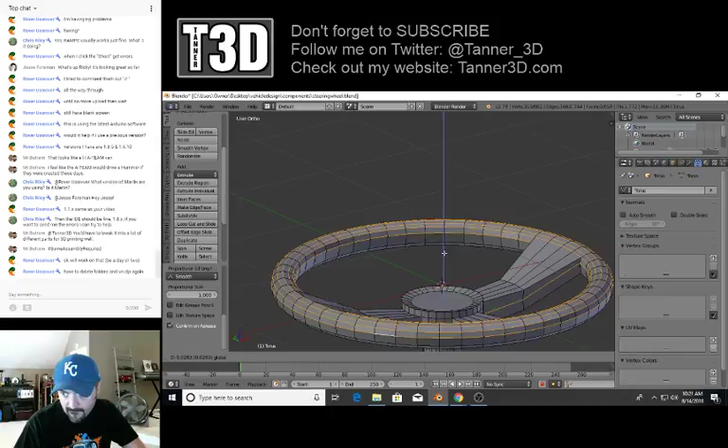Beef that up a little bit and see if that doesn't make it a little... oopsie. Overlooked that, that was almost bad. Beef that up a little bit. Well, there's something I want to do different. No, I didn't move all of them, it just moved that one.